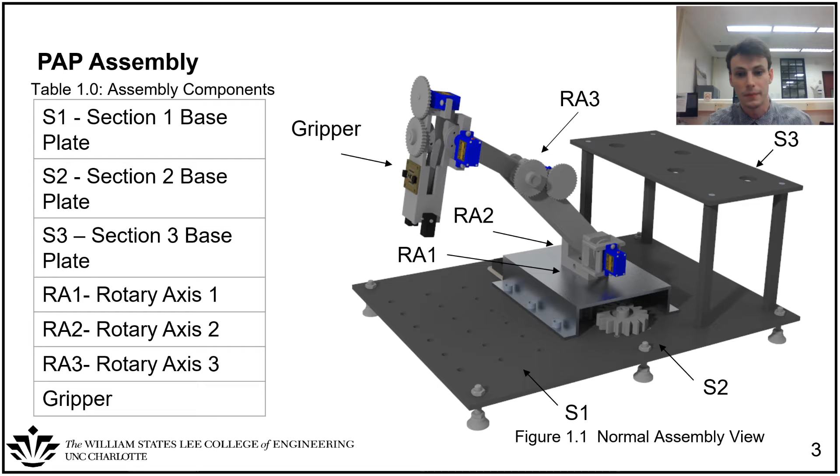I will now be passing it on to my colleague Harrison to talk about the base plate. Okay, well thank you, Brandon. My name is Harrison and I'm going to be talking about the base plate. In this figure you can see that the base plate has 3 main sections, S1, S2, and S3.

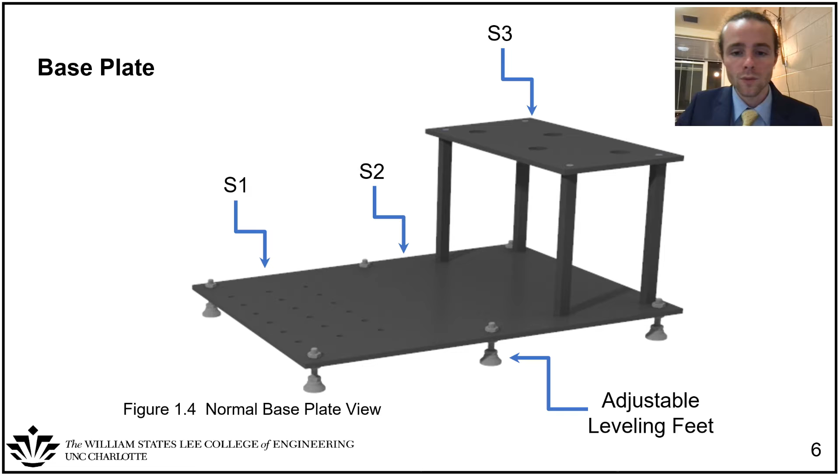In the bottom right hand corner of the figure you can see that the base plate has leveling feet, and these adjustable leveling feet are used to make sure that the base plate is always normal to the surface and that it's not uneven, so the robot is not operating on a surface that might cause it to tip over. The base plate has a section S3 13 centimeters higher than sections S1 and S2.

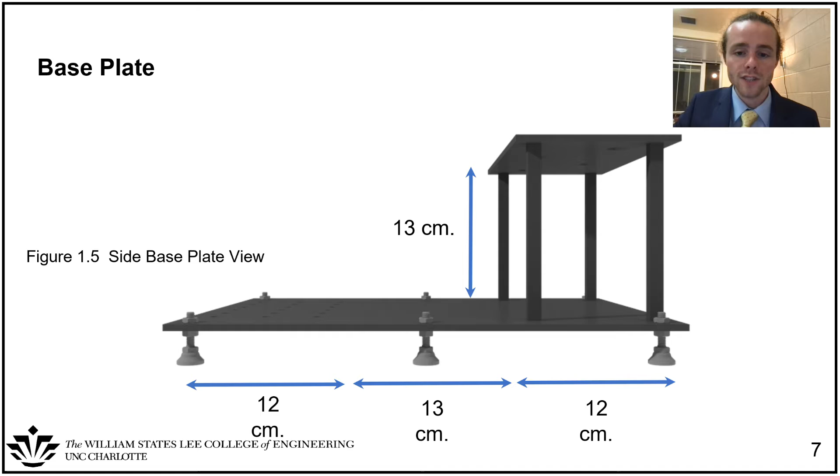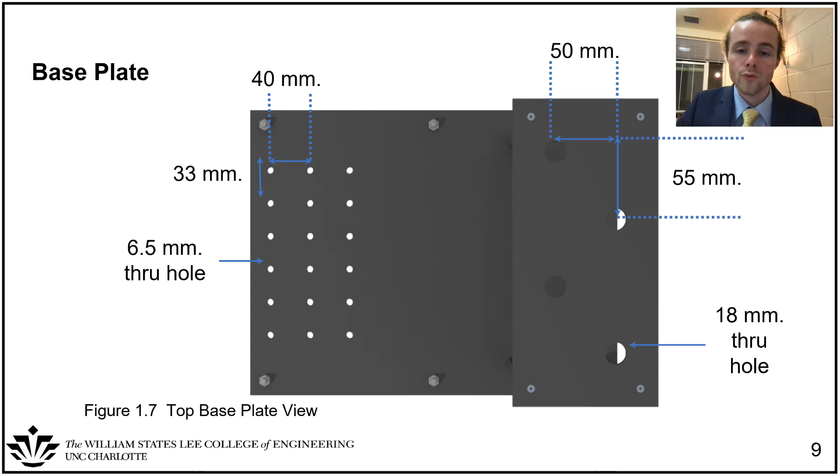The holes that will be holding the steel spheres in location before they're dropped off have a 6.5 millimeter through hole, and an 18 millimeter through hole for the drop-off location holes.

For our design, we wanted to consider mathematical and design constraints, and we're going to talk about the applied stress, the plate deflection, our factor of safety and the failure modes, the material strength, dimensional or geometry constraints, our material cost, the machinability of this material, and the availability of this material.

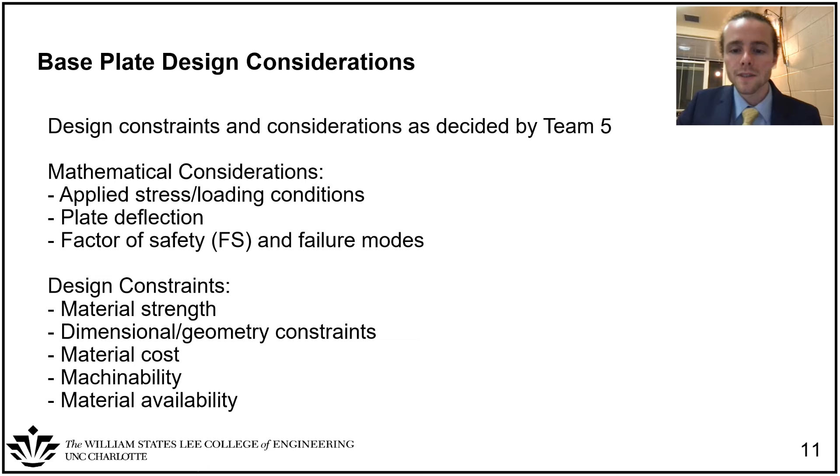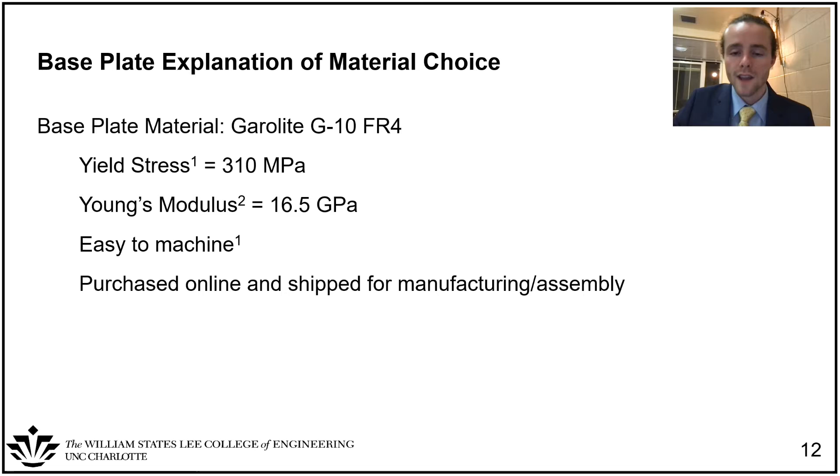So the base plate sections S1, S2, and S3 are going to be made out of Garolite G10 FR4. This material has a yield stress of 310 megapascals, a Young's modulus of 16.5 gigapascals. It's easy to machine and can also be purchased online and shipped for our manufacturing and assembly, making it extremely convenient for our final production.

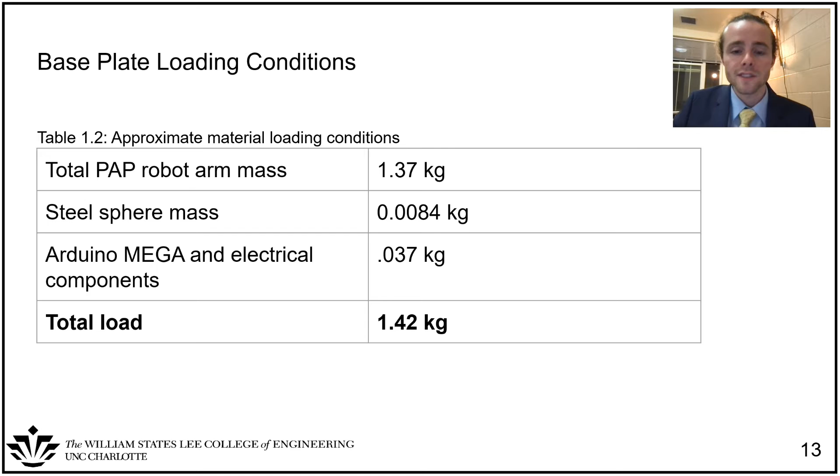For the loading conditions, this base plate has a total load of 1.42 kilograms, and this includes the total robot arm mass, the steel sphere mass, and the Arduino MEGA and the electrical components associated with it.

So after learning about the loading conditions for the base plate, we were able to create shear moment diagrams for each section, section S1, S2, and S3.

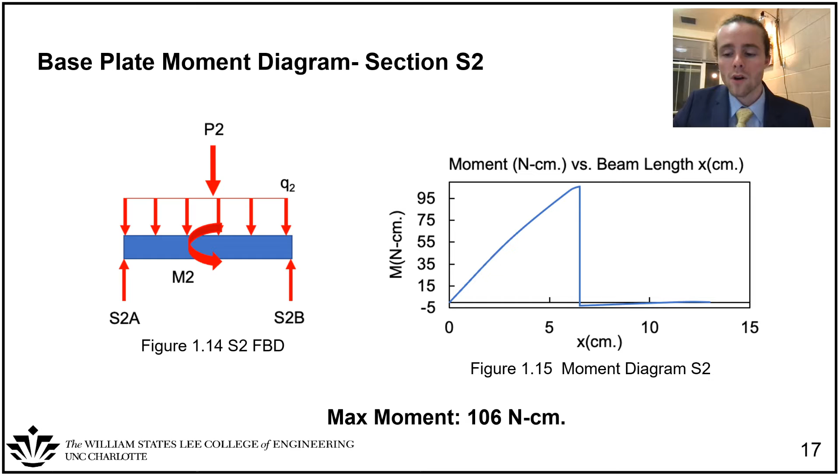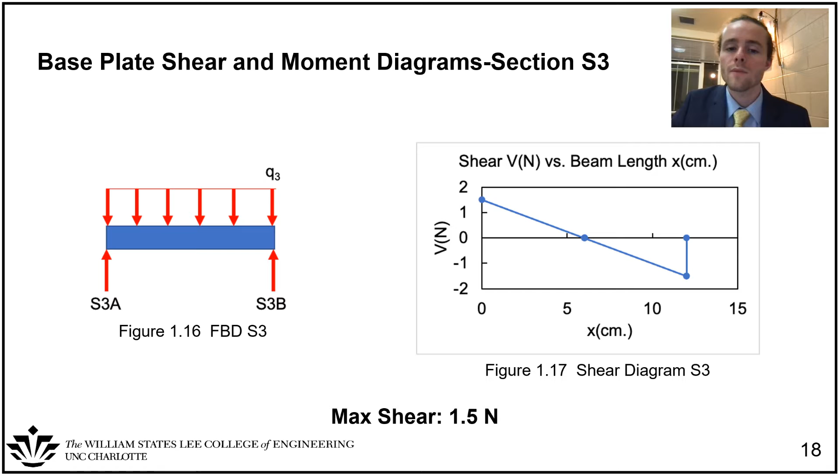Section S3 has the exact same maximum shear of 1.5 newtons. It's important to note that sections S1 and S3 have the same loading conditions, so the maximum shear and maximum moment are identical. The maximum moment for section S3 is the exact same as section S1, at 4.5 newton centimeters.

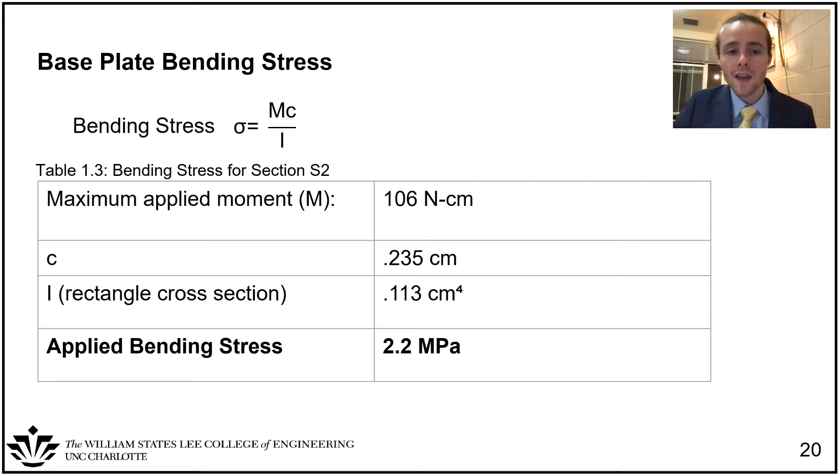For the bending stress of the base plate, we have an applied bending stress of 2.2 megapascals, with an applied maximum moment of 106 newton centimeters, as previously mentioned from section S2.

For our allowable stress calculation, we use the equation yield stress over N, where N is a factor of safety. Our yield strength of Garolite G10 FR4 is 310 megapascals, and we have a factor of safety of 2, which yields an allowable stress of 155 megapascals.

It's important to note that the applied stress of 2.2 megapascals is much lower than the allowable stress of 155 megapascals. This helps confirm that we can use the material we selected and move forward with the rest of our calculations for the remainder of the pick and place robot arm.

For deflection of section S1, it has a maximum deflection of negative 3.6 times 10 to the negative 4. For deflection of section S2, it has a maximum deflection of negative 4.3 times 10 to the negative 3 centimeters. This is a very small deflection, but it is a little bit more than section S1.

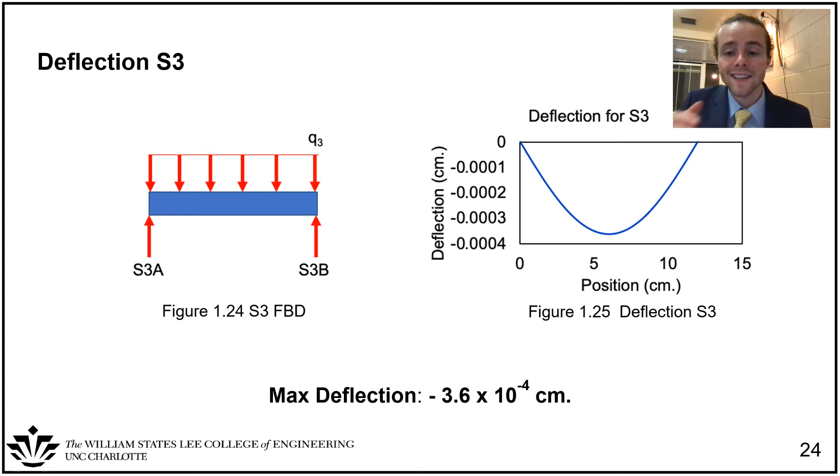For section S3, we have a maximum deflection of negative 3.6 times 10 to the negative 4, and it's important to note that this deflection is the exact same as section S1, and this is also a very small deflection value. All right, thank you, Harrison.

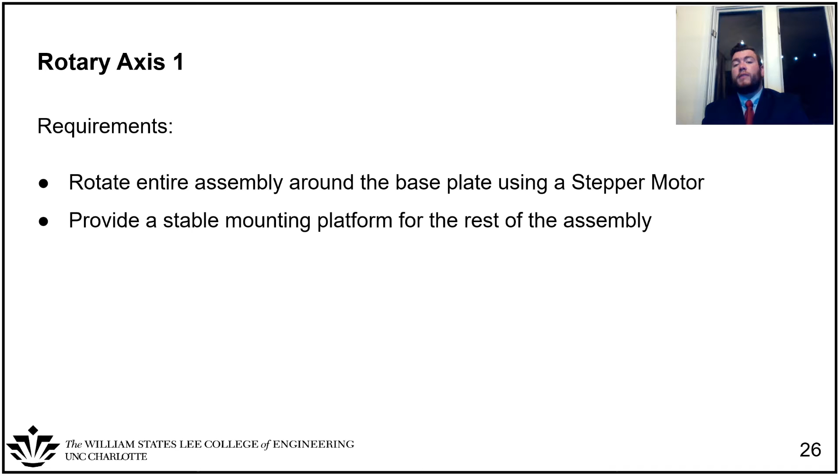Here you can see an exploded view of RA1. There are a lot of parts here, but do note that there is a 2-to-1 gear ratio, as well as various ball bearings to reduce friction, and different types of fastening hardware used in this application.

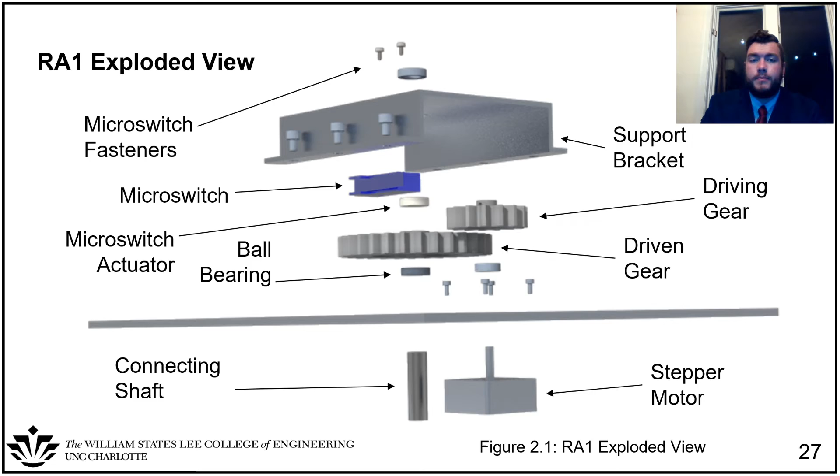Basically it's just going to allow the robot to function a lot more smoothly. Here you can see in blue a limit switch, or micro switch, which is an alternative to a rotary encoder so that we can home the stepper motor.

Here's an isometric view of Rotary Axis 1 without the bracket, so you get a better idea of what's going on. You can also see the motor placement, which is underneath the base plate. This was a major design consideration.

There were a few options that I had. I ended up going with the bottom mount just due to simplicity. Really, any other orientation would just add too much complication, and this works out very well.

This micro switch actuator you can see in the top picture, in white. That's essentially just a collar with a long set screw, and when that shaft rotates, it will contact the micro switch and home Rotary Axis 1.

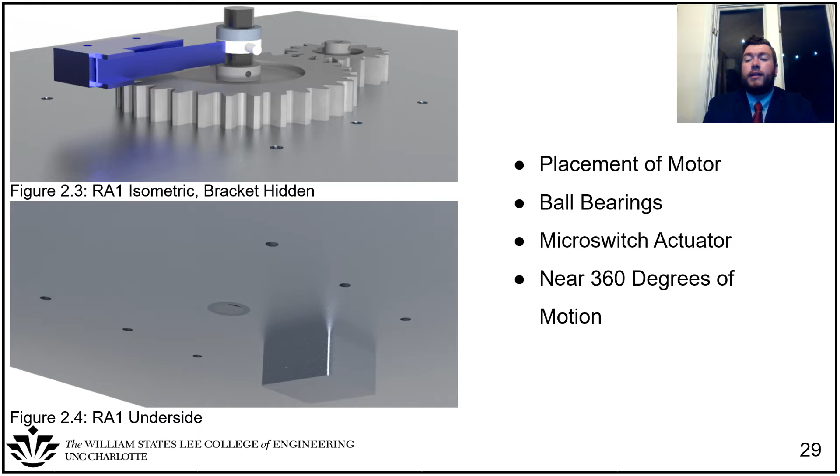This placement of the micro switch actuator allows for almost 360 degrees of motion, which is ideal. So essentially, no matter what orientation we put this in, the micro switch can just stay right where it is, and it'll give us the freedom to rotate wherever we want.

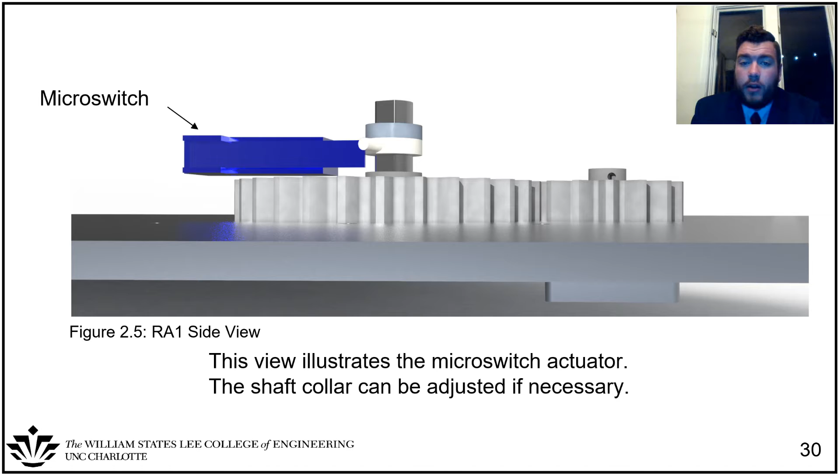That collar will just contact the micro switch when the shaft rotates, and it can be adjusted if necessary. The first calculation I did for Rotary Axis 1 is the resolution calculation.

The way I decided to do this is if we take the sphere's radius and divide it by 2, so we have half the radius of the sphere. That is how much accuracy we want to have, because if a sphere going into a hole is within half of the radius, it's going to end up falling into that hole. So that is where I base these accuracy calculations off of.

Greater than 50% accuracy is required to get the sphere in the hole, and with a 0.9 degree resolution, which is a result of a 1.8 degree resolution at the stepper motor with a 2-to-1 gear ratio, we end up with more than enough accuracy with either step choice to get the ball into the hole.

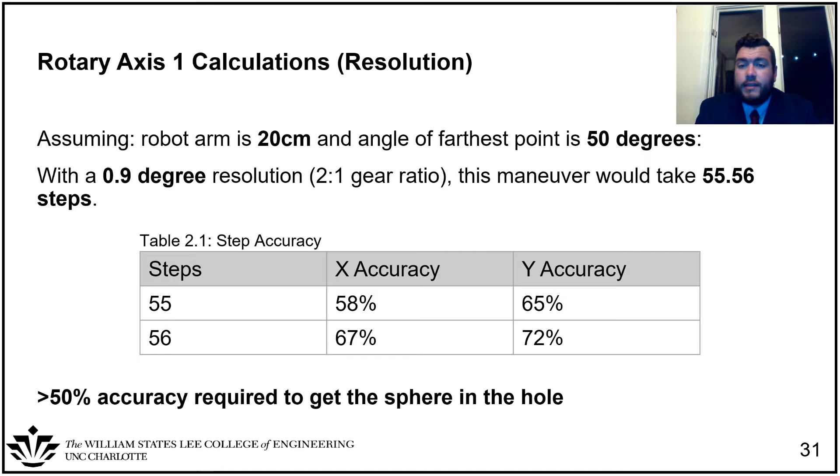The load torque comes into play here as well. This is our motor torque, or the required torque at the motor as seen through the gear set, which ends up being 0.0396 Newton meters. If we add a safety factor of 2 into the equation, we end up with a required torque of 0.0791 Newton meters. For reference, the stepper motor used in these calculations and in this project as a whole is rated at 0.16 Newton meters for the holding torque, so that'll be more than enough torque to drive rotary axis 1.

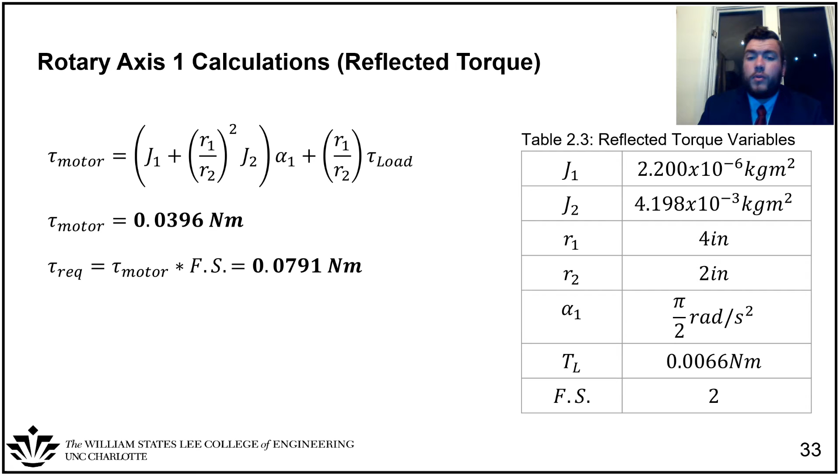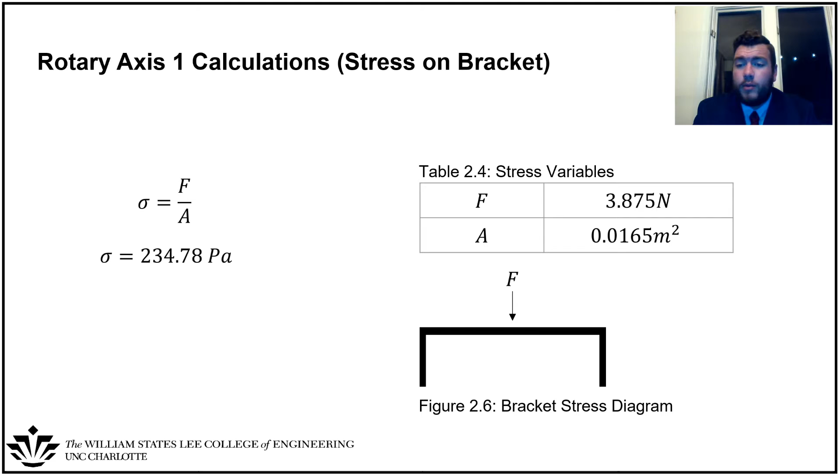Here you have a very simple stress calculation. This is just the stress that the rest of the assembly will apply to rotary axis 1, specifically the bracket of rotary axis 1. We end up with a stress of 234.78 pascals, which is very small, further demonstrating that the bracket will be more than substantial to support the rest of the robot.

Next up, we have our deflection calculation for the bracket. To calculate this, I treated the bracket as a simple beam with a 1/8 inch material thickness and 5.95 by 4.35 inch dimensions. I also used 6061 aluminum with a Young's modulus of 68 gigapascals. You can see the bracket diagram on the right to help better illustrate this.

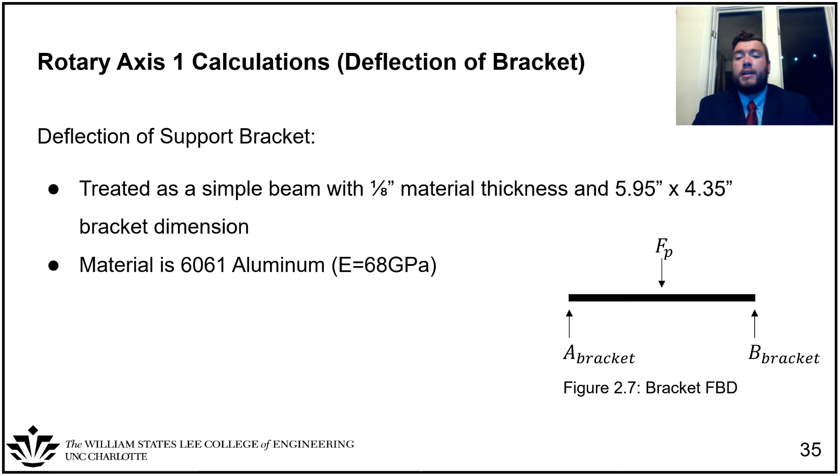Finally, we have our rotary axis 1 component list, which highlights the mass and quantity of each component of rotary axis 1. Here on the right, you can see the stepper motor I've modeled in CAD and used for these calculations, as well as the micro switch modeled in CAD as well. The most notable part of this slide is the total mass, in the bottom right corner, which is 0.812 kilograms. Pretty hefty, but the base plate will have absolutely no problem supporting this.

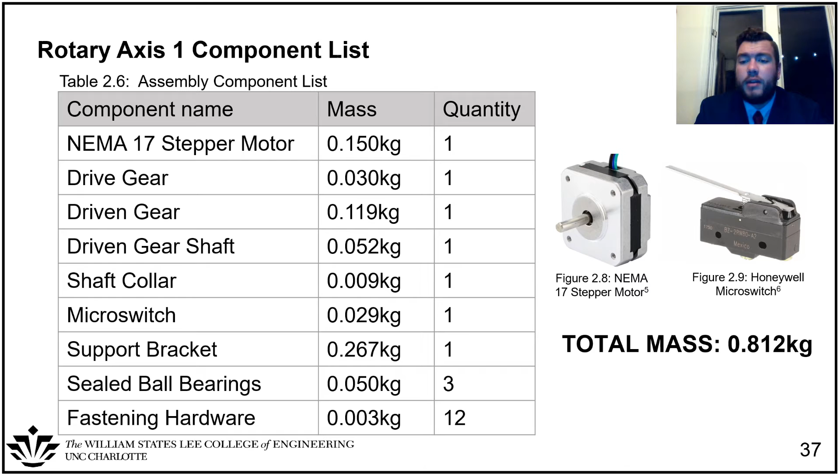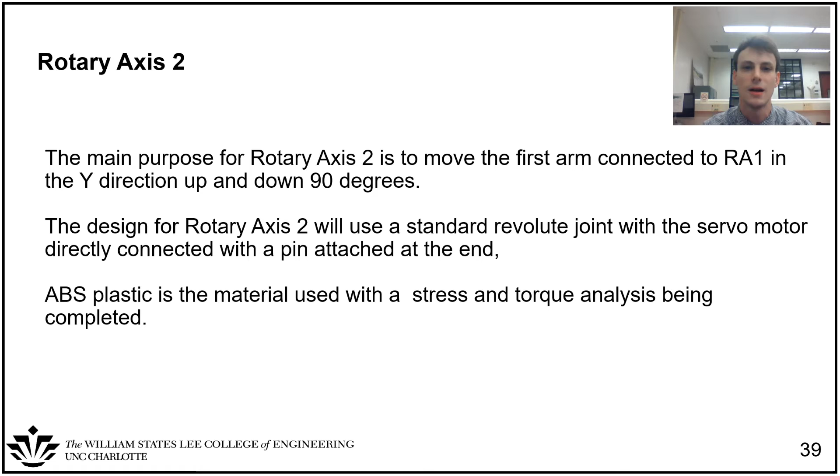The design for rotary axis 2 uses a standard revolute joint with the servo motor directly connected to the pin using a keyway and key stock. It uses ABS plastic, and the torque analysis will be shown next.

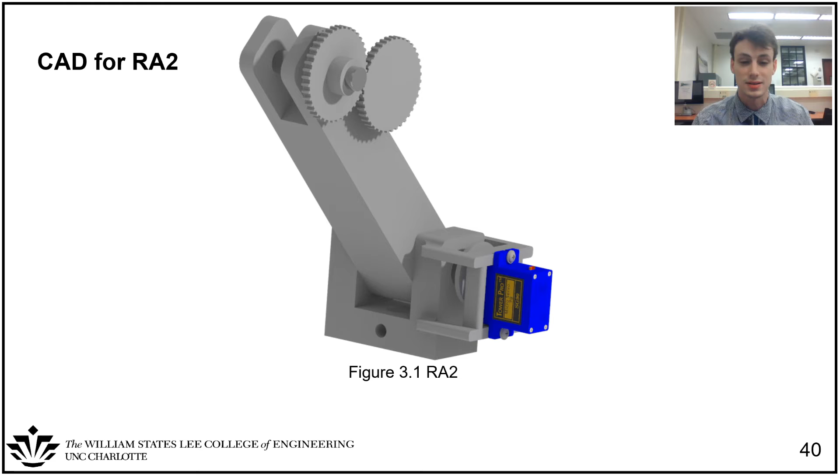Here's figure 3.1, rotary axis 2. Here's the exploded view for rotary axis 2.

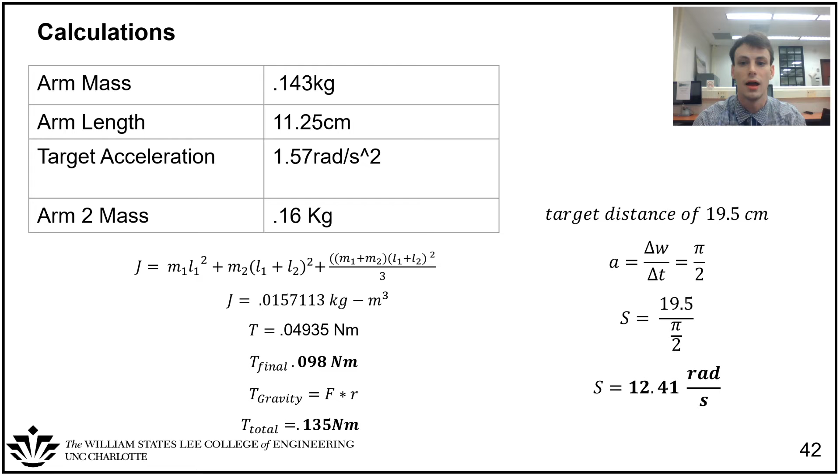Here are the beginning calculations for rotary axis 2, given the arm's mass, length, and target acceleration, and the mass of arm 2, because rotary axis 2 has to move the whole arm and everything attached, i.e. rotary axis 3 and the gripper. Our T total is 0.135 Newton meters after a safety factor of 2 is applied, and the gravitational load. For the speed calculations, we have a target distance of 19.5 centimeters, achieved at 12.41 radians per second.

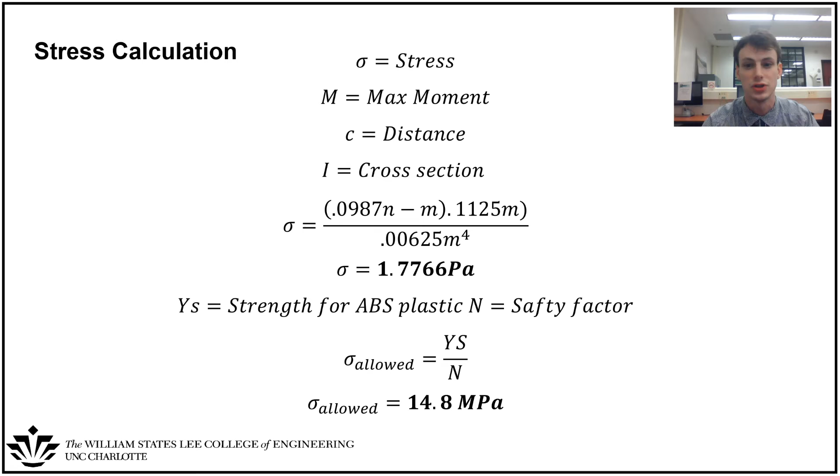Here's the completed stress calculation to make sure no fractures occur within rotary axis 2. We have an allowed stress of 14.8 megapascals, given the yield strength of ABS printed plastic and a safety factor of 2. Here are deflection calculations for rotary axis 2.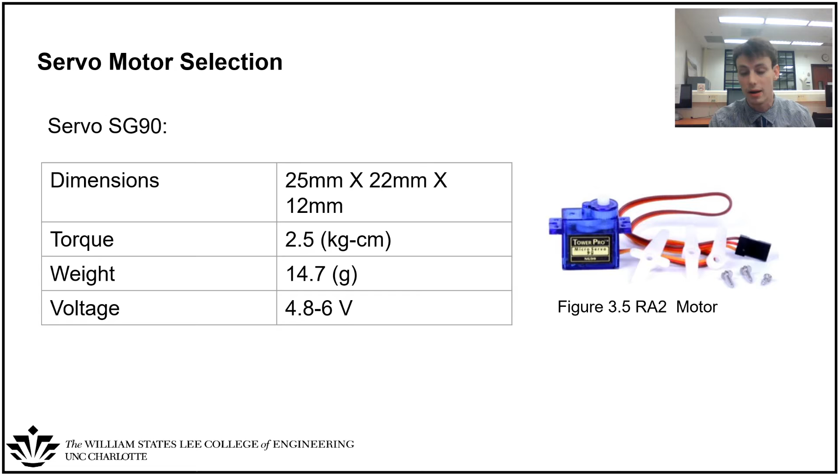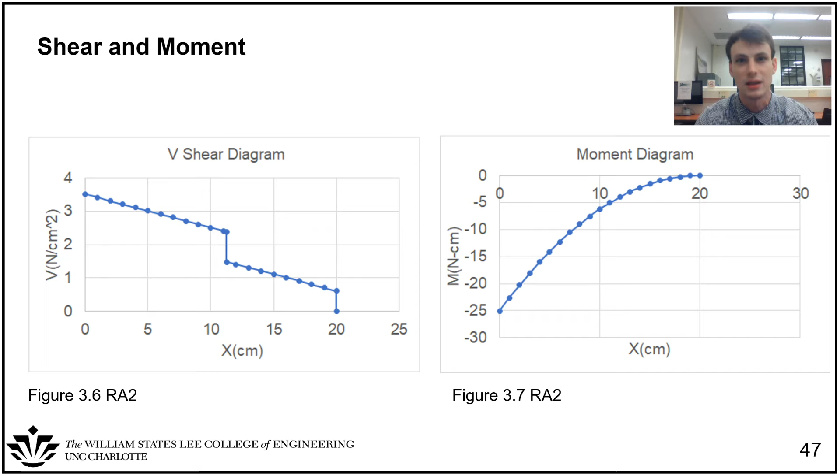Last, we have a complete components list of rotary axis 2, given the pin, base, arm, motor, motor frame, and connection and their estimated weights. We have a total estimated weight of 0.3 kilograms with 5 parts.

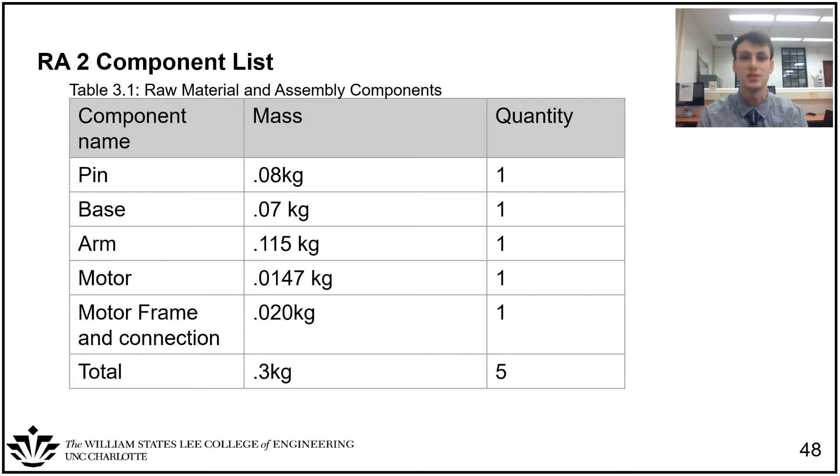I will be going over Rotary Axis 3, which is the second linkage in the robot arm. The main requirement of Rotary Axis 3 is that it provides rotary motion for the second linkage of the robot arm, holds the trigger actuator for the gripper, and supports the gripper.

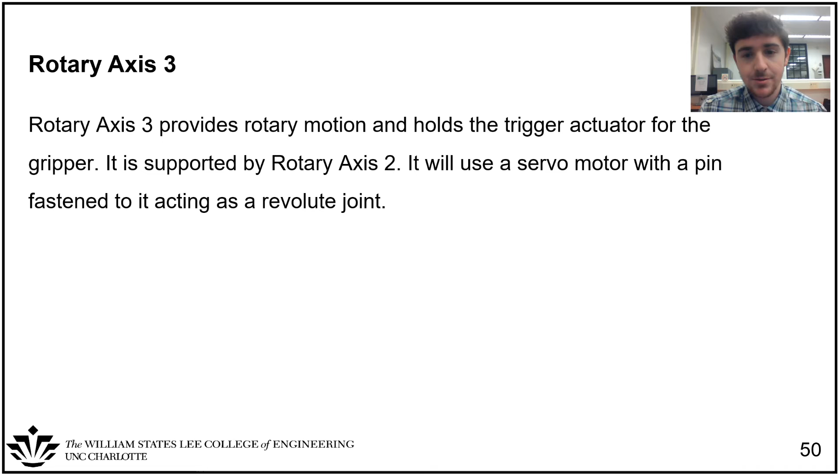RA3 is supported by Rotary Axis 2, and the mechanism for RA3 will be a servo motor attached to a pin so that whenever the servo motor is activated, the whole arm will turn.

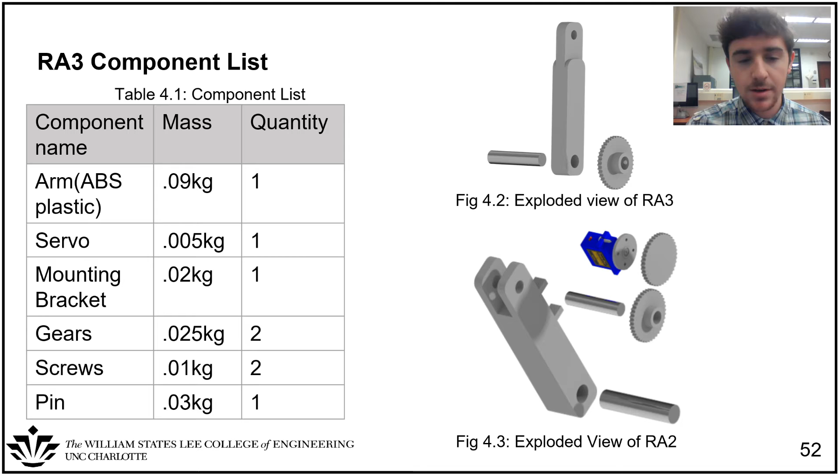The component list is made up of the arm, which is made of ABS plastic, the servo motor, the mounting bracket, two gears, two screws to screw the servo in, and one pin, all adding up to about 0.18 kilograms.

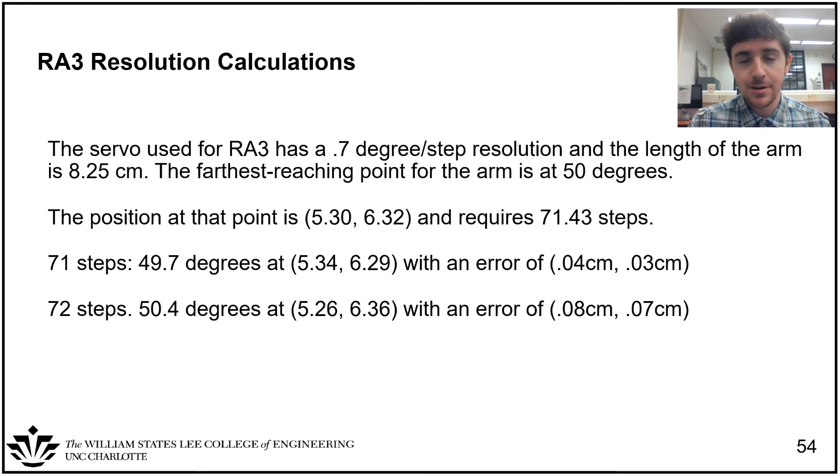Here are the resolution calculations for RA3. The servo used for this has a 0.7 degree per step resolution, and the length of the arm is about 8.25 centimeters. If you look at the errors calculated below, this is for the farthest reaching point of the arm, and the errors are so small because of how many steps the servo has to take.

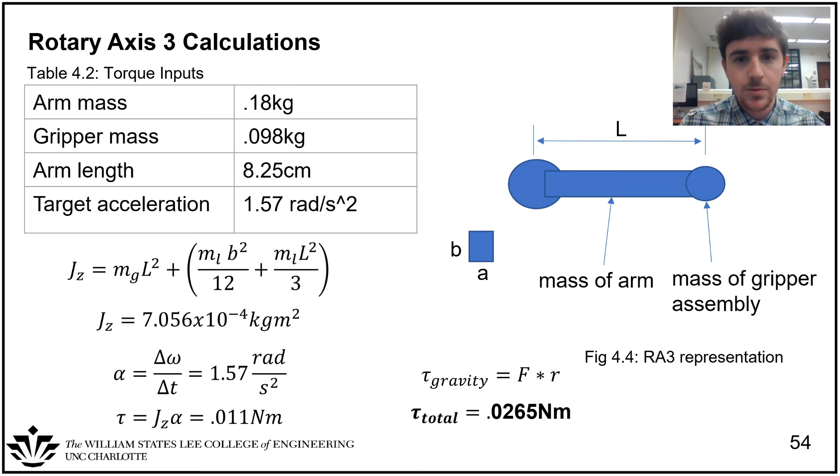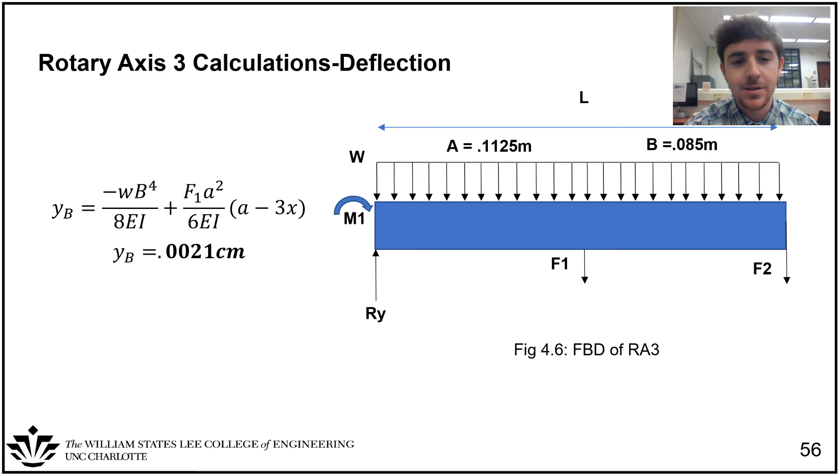Here are the deflection calculations for RA3. The free body diagram to the right shows RA2 and RA3. You can see 2 point loads at the end of RA2 and another one at the end of RA3. You can also see a uniform distributed load because material thickness and size is about the same for both arms.

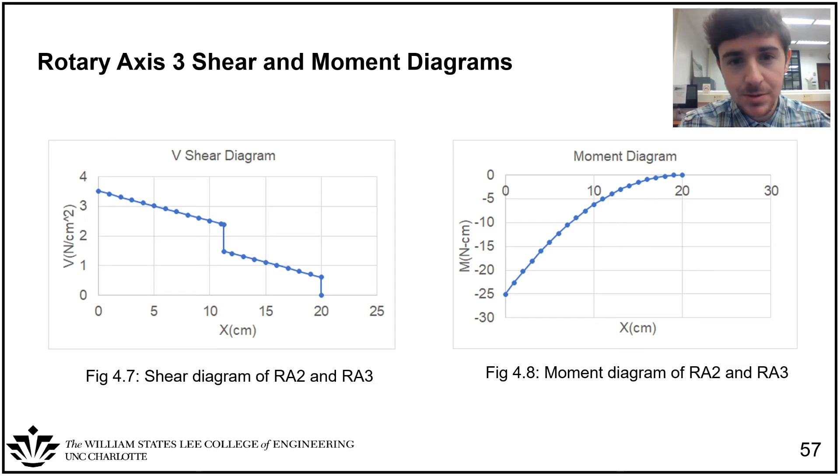Here are the shear and moment diagrams from the free body diagram of RA2 and RA3. As you can see in the shear diagram, the two drops are at the end of each of the arms, and from the moment diagram we get the max moment used for the stress calculations on the next slide.

I will pass it on to Masden for the gripper assembly.

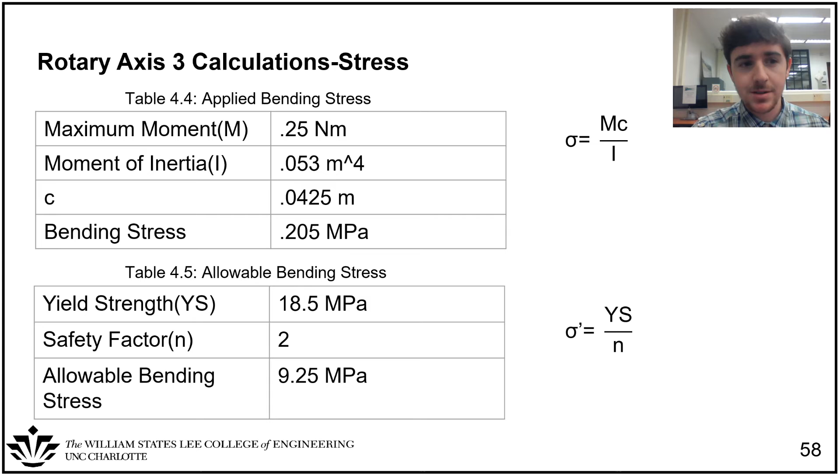To go over what the entire gripper subassembly is composed of, first we have the stabilization wrist servo, which is what powers the connection between the gripper and rotary axis 3. Next we have the magnetic crank and slider. This is the mechanism that is going to be used to actually release and pick up the steel ball bearings on the base plate. We also have the accelerometer, which is going to work in conjunction with the stabilization wrist servo, and this will keep the gripper subassembly normal to the base plate at all times.

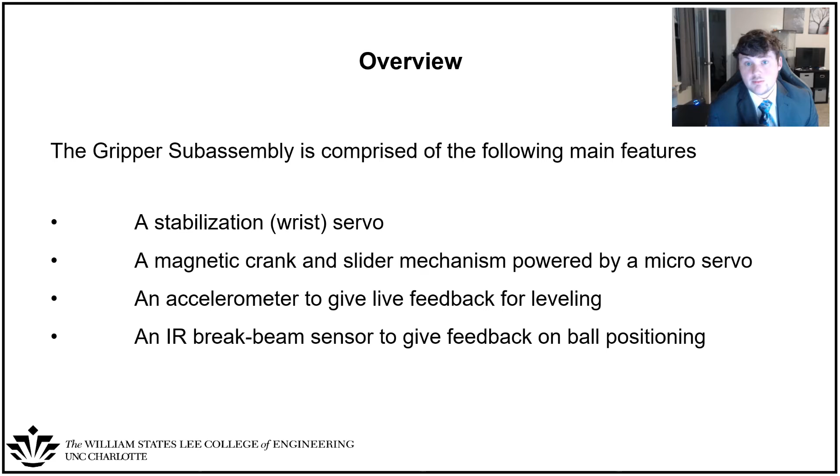And lastly, we have the IR break-beam sensor, which is going to allow us to autonomously control the pick and place robot in order to pick up the steel ball bearings in specific locations.

For the crank and slider mechanism, we decided to use stainless steel pins with set screws, which keeps them in place so all components will be set.

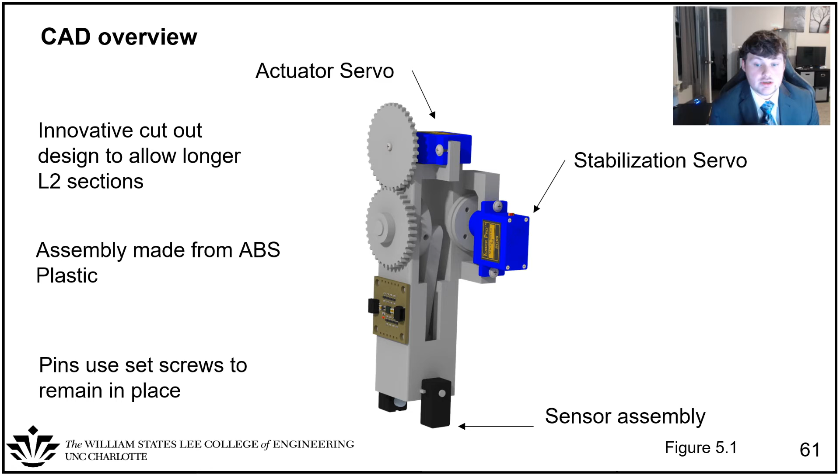On the gripper here, you can see we have the actuator servo on the top, which is what powers the crank and slider mechanism. We have the stabilization servo and the sensor assembly at the bottom, which is what we use to find the steel ball bearings on the base plate itself.

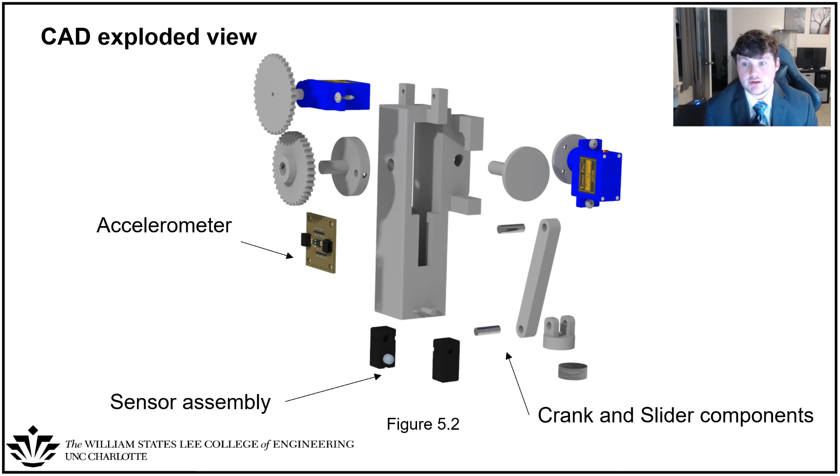In regards to the safety factor of these servos, considerations we had were small size and loading conditions, as well as motor torque failure of the servos. The factor of safety we chose for the servos was 3. For the stabilization servo, we had a safety factor calculated of 6.1, and a safety factor of 4 calculated for the actuator servo.

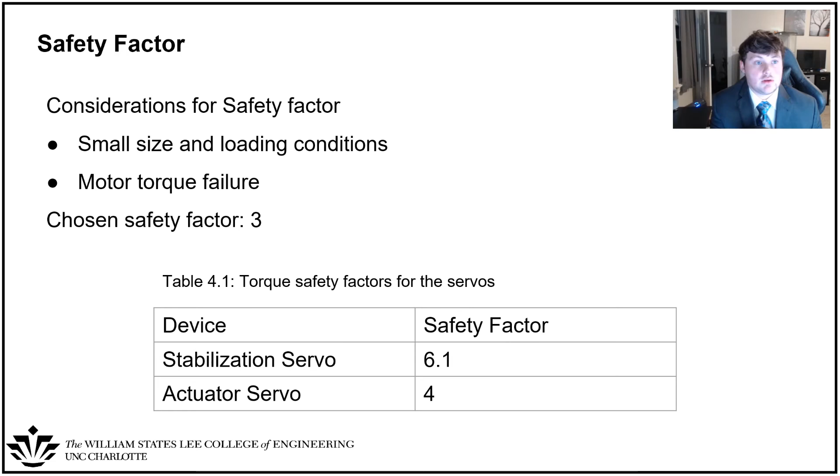So now I'm going to hand it off to Alex, and he's going to go over some more of the calculations in regards to the gripper subassembly. Thank you, Masden. My name is Alex South.

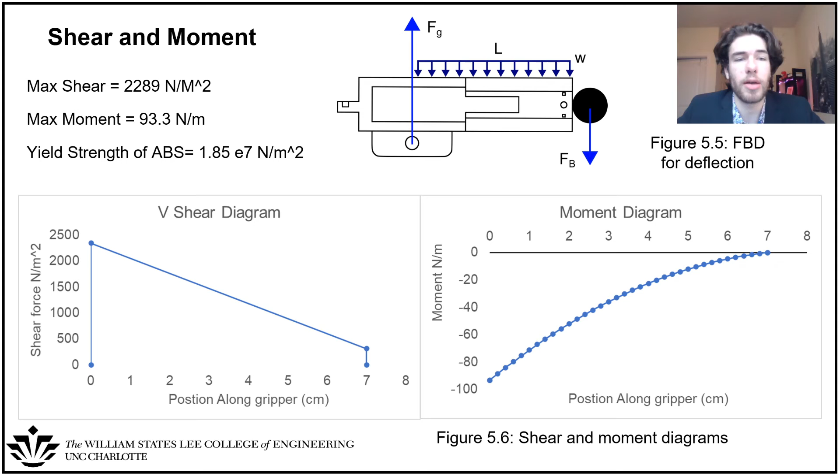You can see our maximum shear was calculated to be near 2 kilopascals, with our maximum moment at near 100 newtons per meter. Analyzing this further, we need to determine the maximum amount of deflection that this subassembly will be under during its maximum loading conditions.

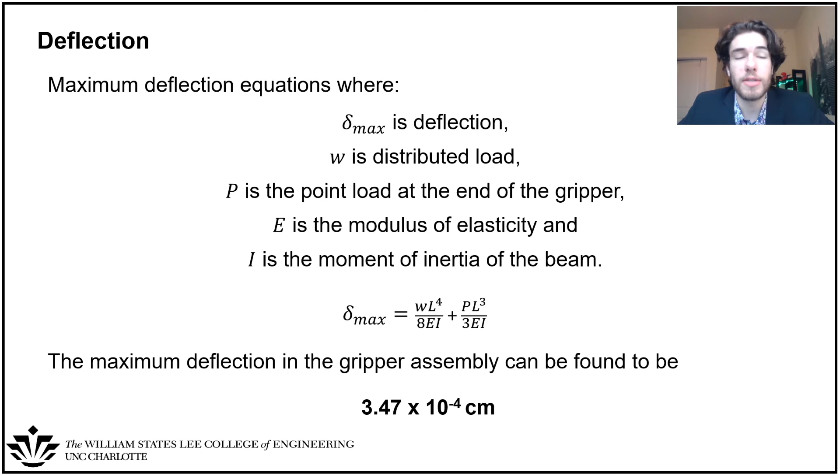Using the formulas that you can see here, we found that our maximum deflection was near 3 to the -4 centimeters, which is sufficiently small for our applications.

We found that our total torque requirement was near 2.5 Newton centimeters, which is important for our decision on the correct servo to use for the stabilization.

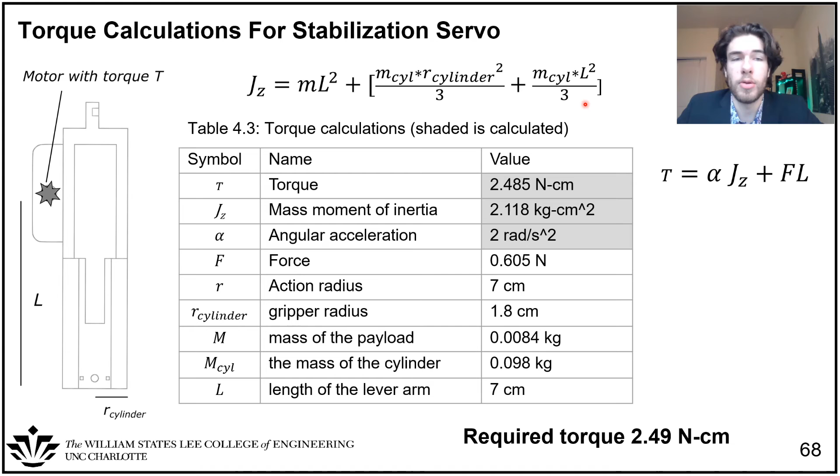Using our torque requirements and our desired acceleration, we decided on the MG92B micro servo, which has an operating speed of 1.28 revolutions per second, and with its torque has a factor of safety of 6.1 at operating speeds, which is approximately half of the stall torque given in the specifications for the servo.

As you can see on the left, we determined that 1 radian per second squared was an optimal angular acceleration for our applications, and this was used to calculate the necessary torque.

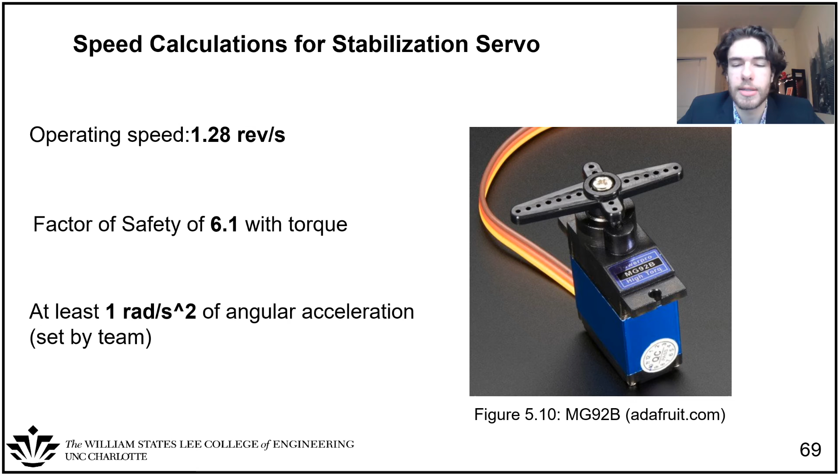In addition to our stabilization servo, we had an additional servo to operate the crank and slider mechanism that detaches and attaches the magnetic tip to the payload. We call this the actuator servo.

We had a few requirements when determining the lengths of this crank and slider mechanism, but the most important one is that the distance required to fully disconnect the magnet from the payload device, the payload steel sphere, was 0.9 centimeters. That came from the supplier.

That gave us an action angle of 45 degrees to 135 degrees of when the servo would be under pressure or under torque while disconnecting from the magnet.

That also gave us a housing distance, which is the distance from our motor to the center, essentially, of the magnetic tip, of 5.715 centimeters. That allowed us to build it into CAD more effectively.

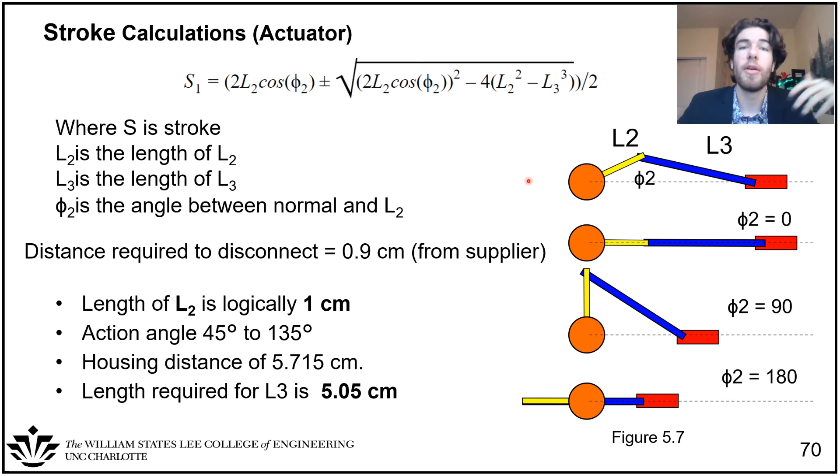And then using the previously mentioned equations up here, we were able to calculate L3 to be 5.05 centimeters for the optimal efficiency. The team then determined that we needed to calculate the perfect strength for our magnetic tip.

If it were too strong, our actuator servo would be put under unnecessary strain, and too weak, we would lose the payload en route. Both of these situations are obviously unacceptable.

We decided that the force of gravity on the payload was not the only force that would be applied to the payload, as the acceleration during the movement of the tip or gripper device would add an additional centripetal force to the payload that must be accounted for in the strength of the magnet.

So with the stroke calculations that Alex talked about earlier, here we have a side view of the crank and slider mechanism. Here you can see the exact dimensions of each linkage as well as the diameter of the pins.

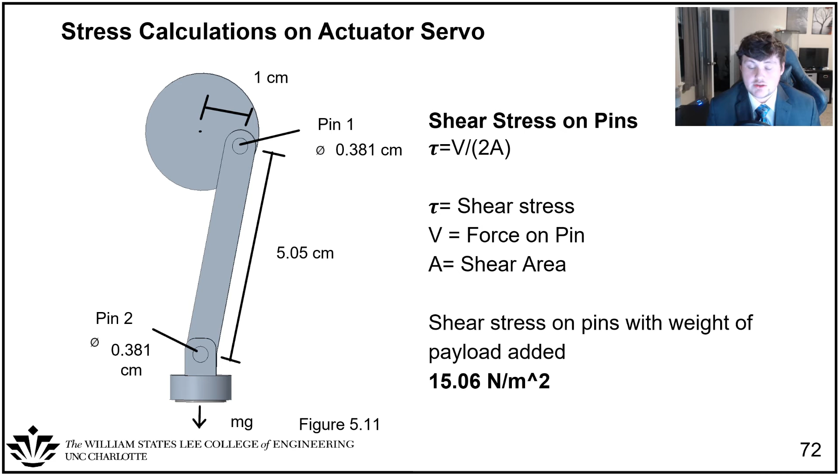Now, the main source of failure that would occur in the crank and slider would be on these pins. So here we've calculated the shear stress, and the shear stress resulting from the force from the payload is 15.06 newtons per meter squared.

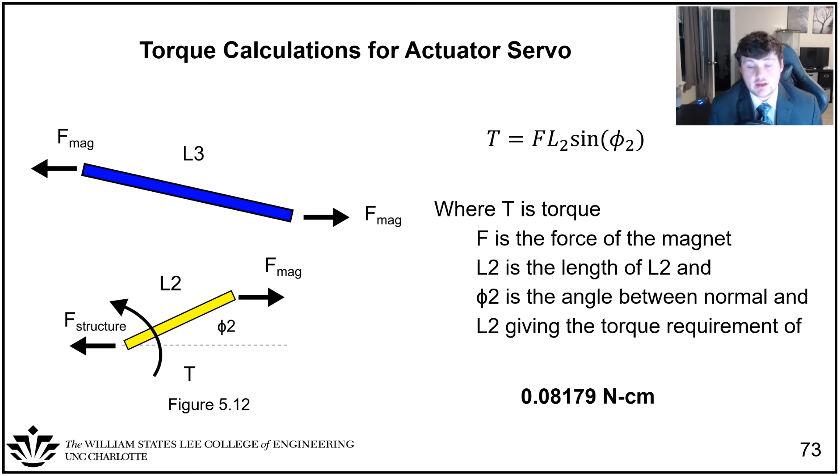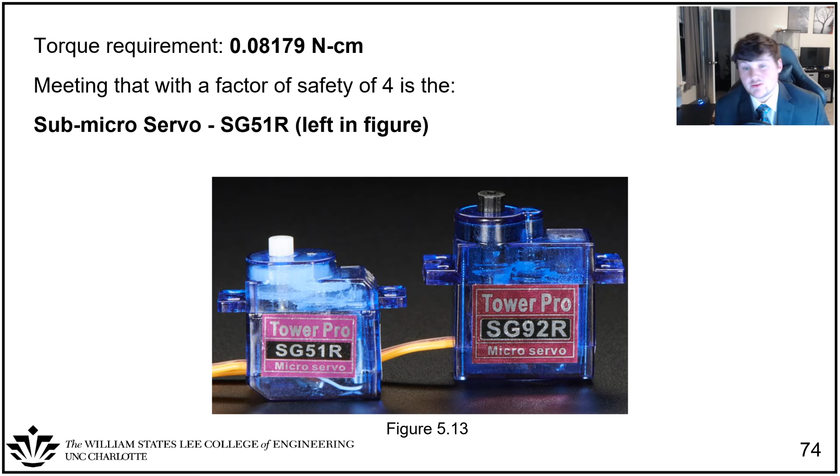Continuing with the crank and slider mechanism, here we show the exact torque calculations we acquired for the actuator servo and what would be required of the servo we chose. We found that the torque required, given the force from the magnet, is 0.08179 newton centimeters. Using these torque calculations, we found that the sub-micro servo SG51R fills its requirements with a safety factor of 4.

Another component involved in the gripper subassembly is the accelerometer. The one we chose is the triple axis accelerometer breakout. This works in conjunction with the stabilization servo and will keep the entire gripper subassembly normal to the base plate at all times.

The last component of the gripper subassembly is the sensor. For this, we decided to use a 2168 photoelectric IR sensor, which utilizes an IR break beam to find the location of the steel spheres. The sensors are comprised of a signal transmitter and a signal receiver. They operate accurately within 500 millimeters, and with the sensors only 25 millimeters apart on the bottom of the gripper assembly, this ensures an accurate reading as well as a fast response time. We chose this as a less expensive route, and the sensors are already in line with the pickup placement for the gripper, meaning we only have to code one location in the final Arduino code.

Now I'm going to hand this over to Alex, who will discuss the entire component list for the gripper subassembly.

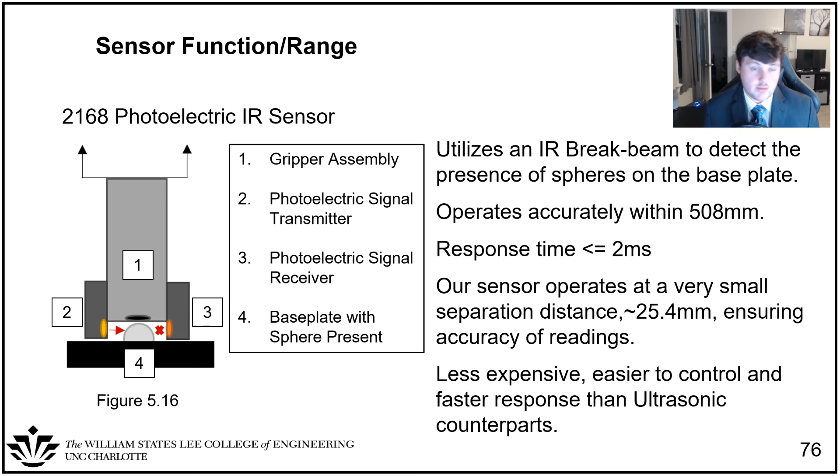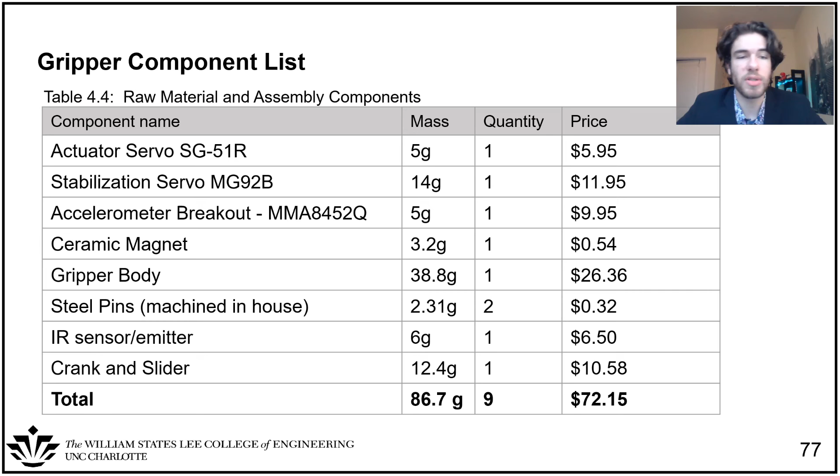Calculating out the price and mass of each of our components, we found that our total cost, not including labor, would be $72.15. That would be enough to cover all of our servos, all of our 3D printing for the gripper, and all of the sensors and necessary components.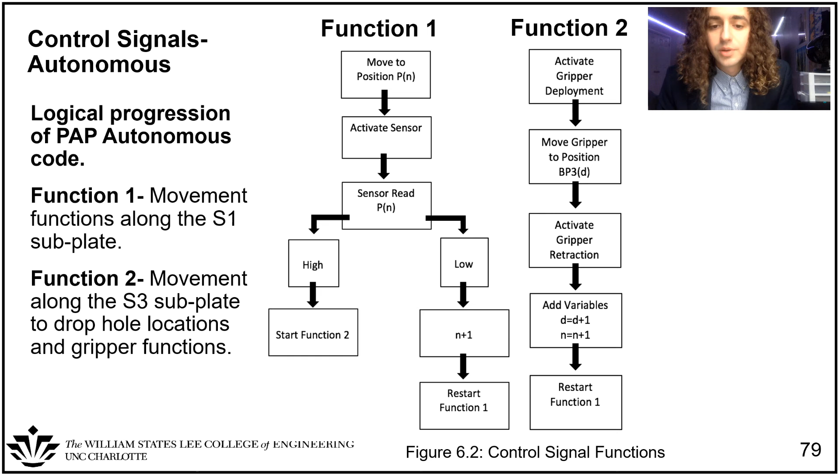Slide 79 deals with the autonomous control signals, essentially a logical progression of our pick-and-place autonomous code. It runs off of two functions. Function 1 deals with the S1 subplate, where our position holes are, and where the balls will show up randomly. Function 2 deals with movement along the S3 subplate, where our drop hole locations are, and also deals with the deployment and retraction of our gripper mechanism. It will add position variables to both the drop hole and the position depending on whether a ball is present or not.

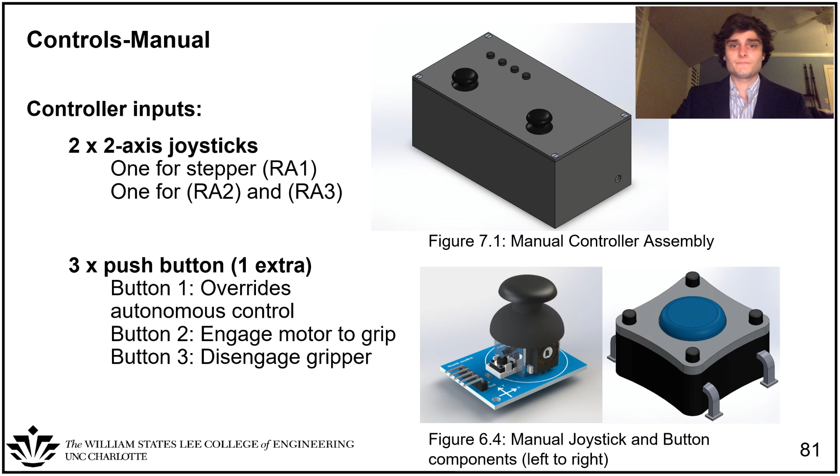This is the controller dimensions from the top view. The width comes in around 150 millimeters, approximately a little under 6 inches, the depth is 80 millimeters, and the height is around 60 millimeters.

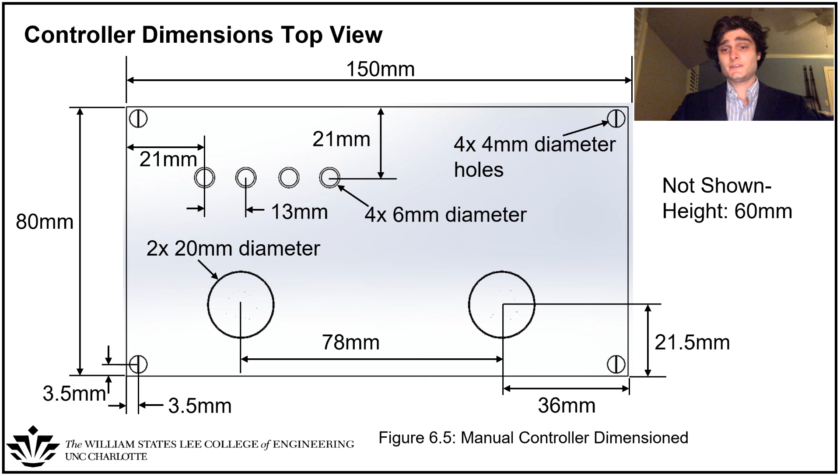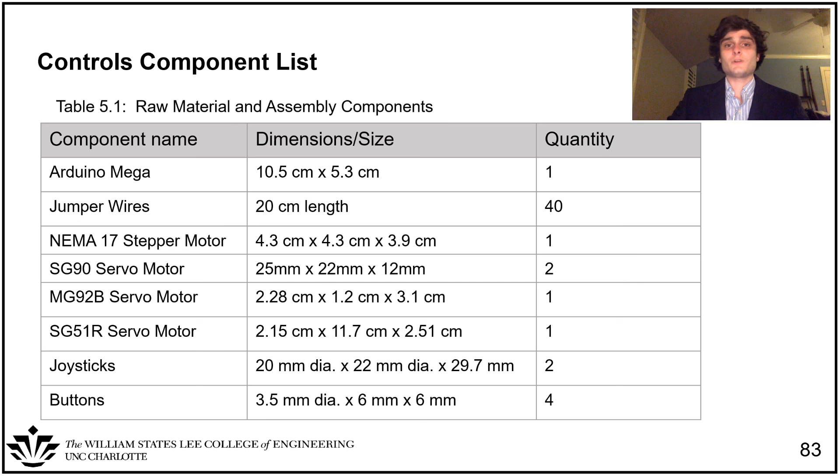The controls component list includes the Mega, the jumper wires, the stepper motor, the motors for rotary axis 2 and 3, the stabilization motors, the actuation motors, the joysticks, and the buttons.

And I will hand it over to Peter.

This is the uncertainty analysis for Team 5's Pick and Place Robot. The 4 holes we are reporting are the worst uncertainties we've calculated: holes 1, 6, 19, and 21, as shown on the diagram to the left. The first table is the inputs for calculating theta positions and such for the sensitivity equations, and the second table shows the worst 4 hole uncertainties in the x and y directions.

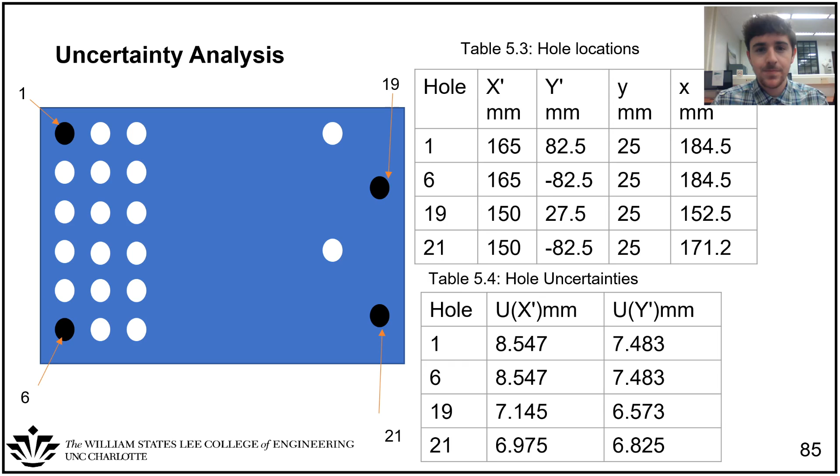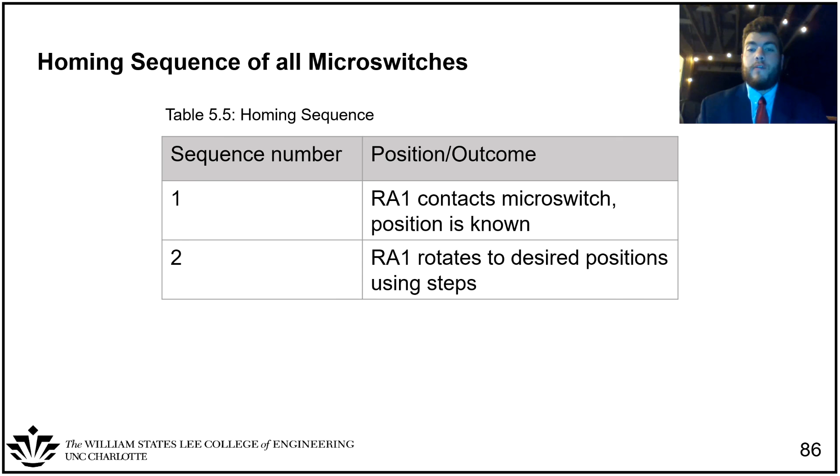On this slide you can see the homing sequence of rotary axis 1. Essentially, in sequence number 1, rotary axis 1 contacts the micro switch, and at that point we know the position of rotary axis 1. From there we can step the stepper motor of rotary axis 1 accordingly to move to any position we choose.

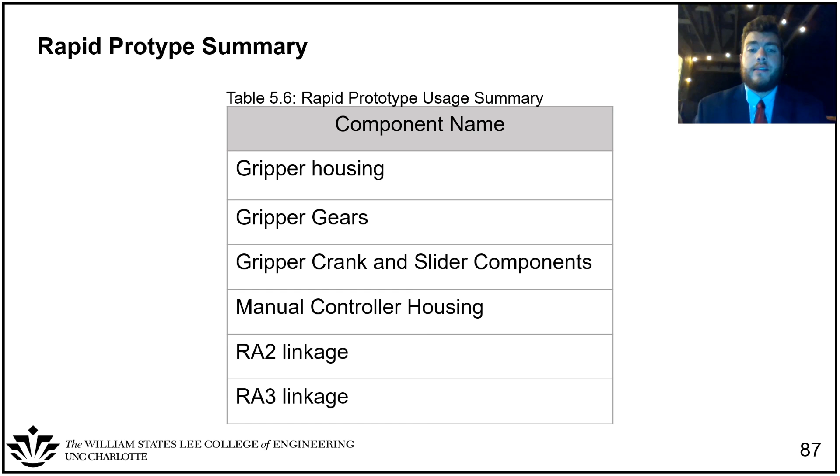Here's a summary of the rapid prototyping components. We have the gripper housing, gripper gears, gripper crank and slider components, the manual controller housing, RA2 linkage, and RA3 linkage. Here we have the manufacturability of each subsystem.

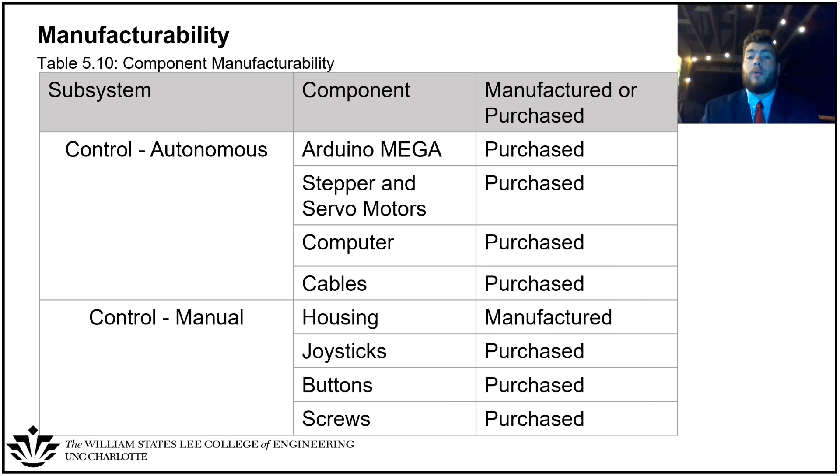For RA2, we have the pin that is manufactured, as well as the base and the arm. For RA3, we have the arm, which is manufactured, and also the pin. For the gripper, we have the housing and gears, which are rapid prototyped. For the autonomous controls, nothing will actually have to be manufactured; everything will be purchased. And for the manual controls, the only manufactured part is the actual housing.

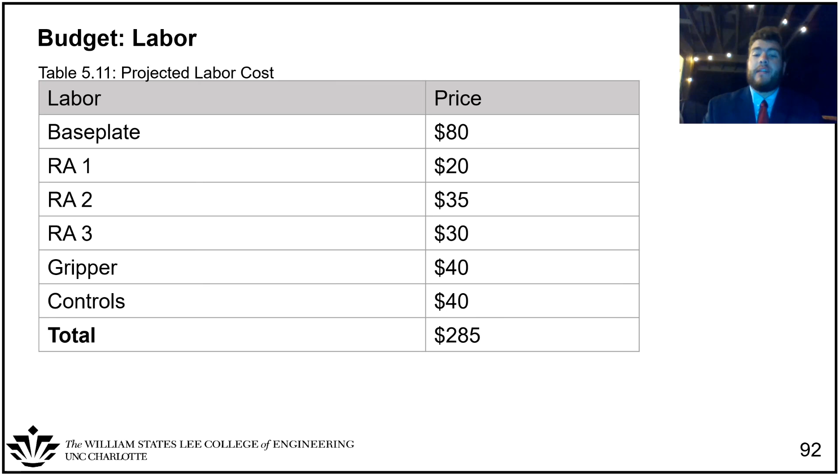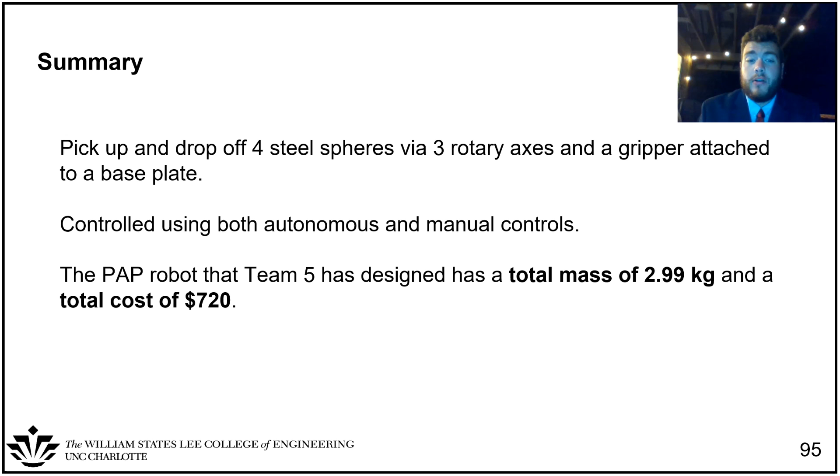In summary, the purpose of this pick and place robot is to pick up and drop off 4 steel spheres with 3 rotary axes and a gripper attached to a base plate. This pick and place robot will be controlled using both autonomous and manual controls. The pick and place robot that Team 5 has designed has a total mass of 2.99 kilograms and a total cost of $720.